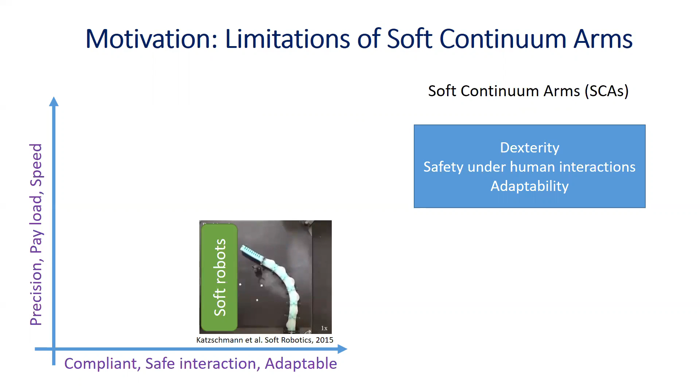While adaptable, their soft and squishy nature may not lend itself to precise operations that require transmitting large loads to the object. As shown in this figure, the capabilities of precision and speed are attributes of rigid link robots. The video shows how a soft robot is not quick enough for a simple pick and place task.

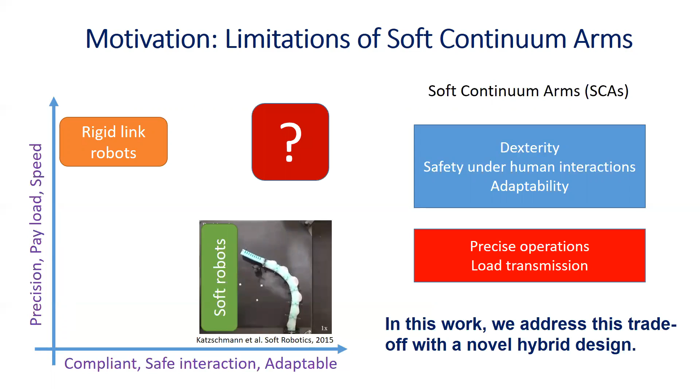So soft robots occupy the right bottom of this graph and rigid link robots occupy the top left in this graph. However, most applications require some unique facets of soft and rigid attributes that are unaddressed by either extremes in the design space. Our aim is to explore designs that are precise, quick, and also are adaptable and safe when required.

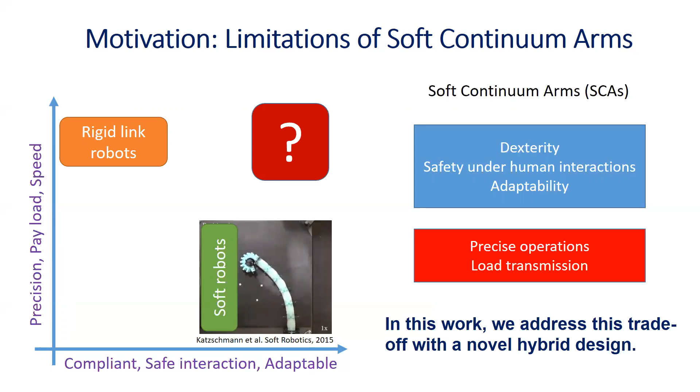In this work, we present a new design concept which is a hybrid between soft and rigid arms to overcome their respective limitations. The variable length nested soft arm or VaLeNS arm consists of a single segment soft continuum arm nested inside a concentric rigid shell. Inspired by the concentric tube continuum robots, an internal mechanism is used to extrude out or retract the soft continuum arm back into the shell.

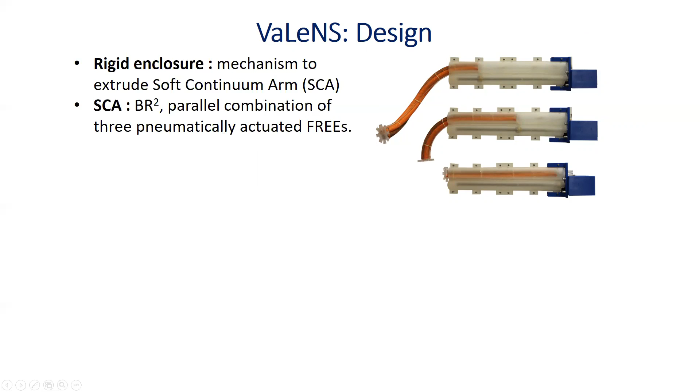When the entire arm is extended out of the shell, the robot is considered soft, while when enclosed completely within the shell, it is considered rigid. The soft continuum arm (SCA) used has a unique asymmetric architecture that can simultaneously bend and rotate in clockwise and counterclockwise directions, leading to spatial deformations as shown here. We call this manipulator BR2.

The rigid enclosure consists of a bipolar stepper motor that has an integrated threaded rod as its output shaft. This arrangement converts the motor into a linear actuator capable of precision open loop positioning. The travel nut is attached to the base of the soft continuum arm. A two-part cylindrical rigid enclosure that houses the soft continuum arm is 3D printed.

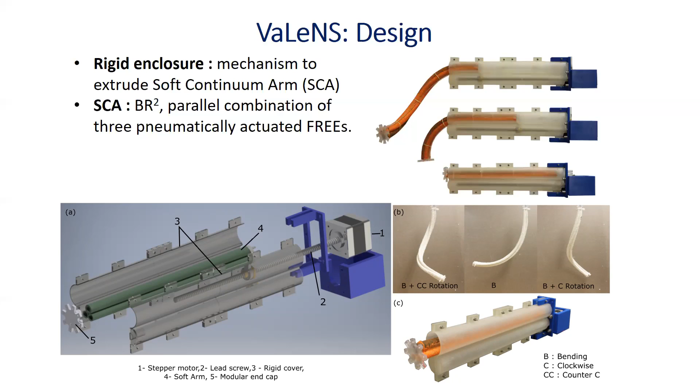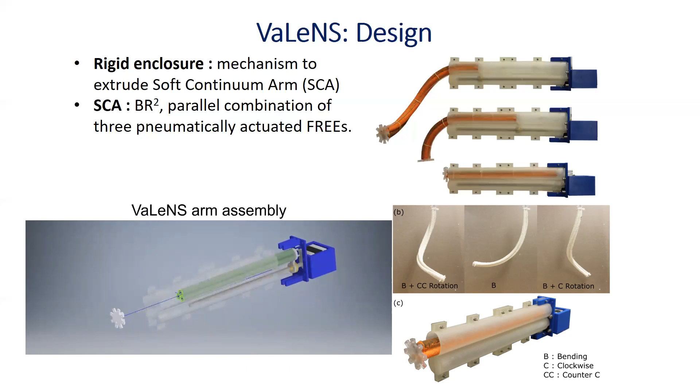The rigid enclosure restricts the rotational degree of freedom of the soft continuum arm when attached to the travel nut. In addition, the rigid enclosure also restricts the deformation of the portion of the soft continuum arm enclosed. The entire VaLeNS arm weighs 550 grams and can be retrofitted to any commercial robot platform. This video shows the assembly of the VaLeNS arm.

The VaLeNS arm with a BR2 soft continuum arm exhibits several fundamental attributes. One of them is its ability to modulate stiffness and transfer impact forces. Stiffness experiments have been conducted with the VaLeNS arm oriented upside down and applying forces at the end tip of the arm. Reaction forces by the end tip to counter the displacement are recorded using a load cell.

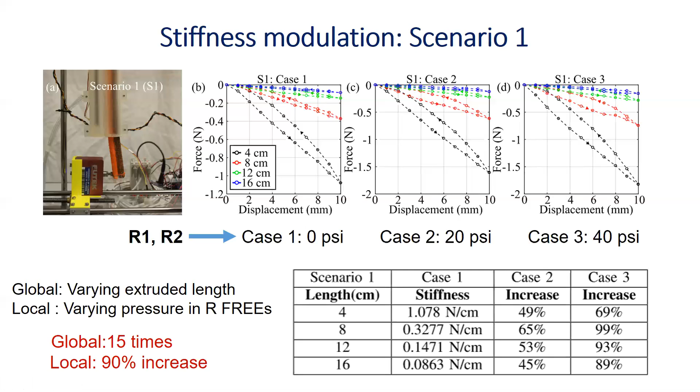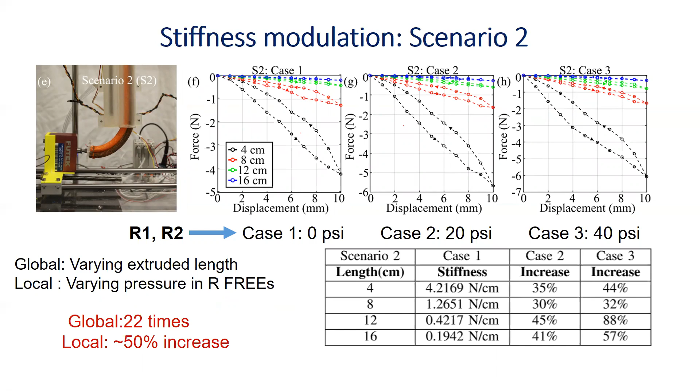For a fixed extrusion length, a stiffness change of 50% is obtained by varying the pressures in rotating actuators. To demonstrate the variable stiffness capability of the VaLeNS arm, a door opening task is performed where the door needs to be turned and pulled for the latch to completely open. In the video, it can be observed that with a 4 centimeters extruded soft continuum arm, the arm successfully transfers the force onto the door lock and is able to open it.

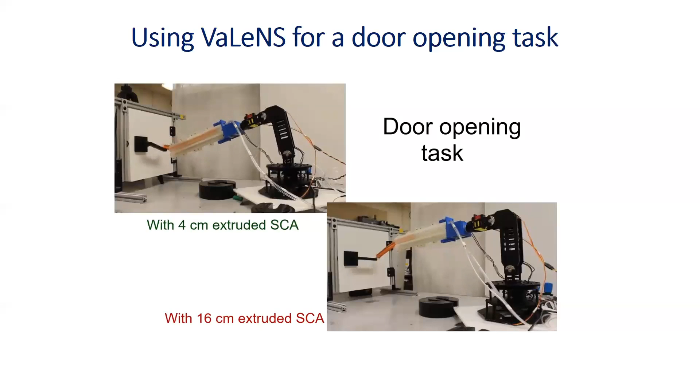The soft continuum arm is pressurized to 40 psi in both the rotating actuators in order to use its high stiffness property. Whereas the same task was unsuccessful when the soft continuum arm is extruded out by 16 centimeters.

The workspace of the VaLeNS arm can be represented as an axisymmetric surface along the YZ plane as shown here. The workspace of the variable length arm is 1200 square centimeters as shown on the left, while the BR2 workspace, when it is fully extruded to 24 centimeters length, which is its maximum extrusion, is 30% lower than the workspace of the VaLeNS arm. The dexterity of the VaLeNS arm is due to two features: inherent dexterity of the BR2 soft continuum arm and the variable length mechanism.

To understand the dexterity due to varying length, we evaluate the ability of the arm to reach a position in its workspace with more than one soft continuum arm length extruded out. The top right plot depicts the minimum soft continuum arm length that needs to be extruded to reach a point in the workspace. It is seen that the extreme periphery of the workspace, dark red regions, can be reached with the fully extruded soft continuum arm alone.

The bottom right plots the difference between the maximum and minimum extruded soft continuum arm lengths that can lead to the same end effector position. It is seen that the center area of the workspace can be approached with different extruded lengths. More than 50% of the workspace can be reached with a length difference of 1 centimeter.

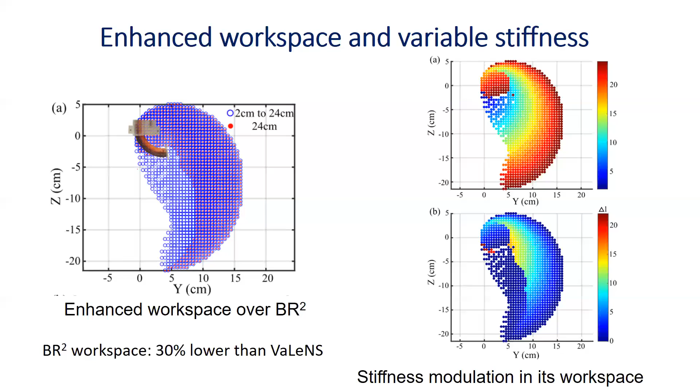When the VaLeNS arm is deployed on a conventional rigid robot, such as a 3-link rigid arm shown here, its overall workspace will be a combination of the rigid links and the soft continuum arm. The implications of the primary attributes studied can lead to classification of the overall workspace into a rigid workspace and varying levels of soft workspace depending on the extruded arm length.

The rigid workspace is generated from the end positions of the VaLeNS arm when extruded length is 0 centimeters. It is hypothesized these points can be reached in a quick, accurate, and repeatable fashion, a key characteristic of the rigid link robots. Furthermore, operating in the rigid workspace will lead to larger force transfer.

The rigid workspace is appended by a larger soft workspace as shown here, which is obtained by extruding the soft arm from 4 centimeters to 24 centimeters under the full range of operating pressures. These end positions are hypothesized to be safe as they involve the extruded soft arm and hence can be used for interacting with humans and other fragile objects.

The VaLeNS arm can be used in cobot tasks where both load-bearing ability and safety are required, albeit at different time periods. In the video, it is shown that the robot system with its soft continuum arm completely retracted is used to precisely pick up an empty plastic box. This is accomplished by fitting a suction cup at the end of the soft continuum arm.

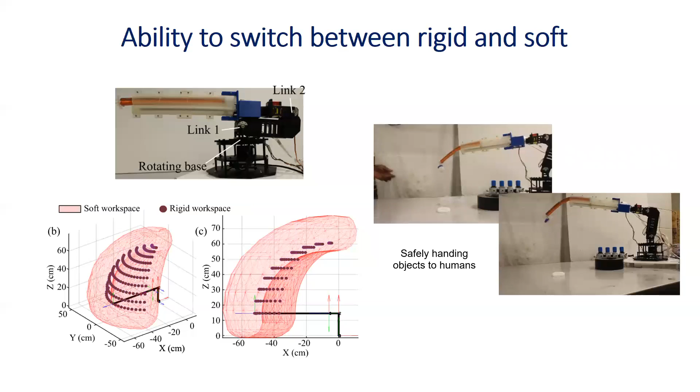These tasks are performed in the rigid workspace of the arm as sufficient forces are required to be exerted on the objects. The objects are then dropped or handed over to the human safely in the soft workspace, where the soft continuum arm is sufficiently extruded.

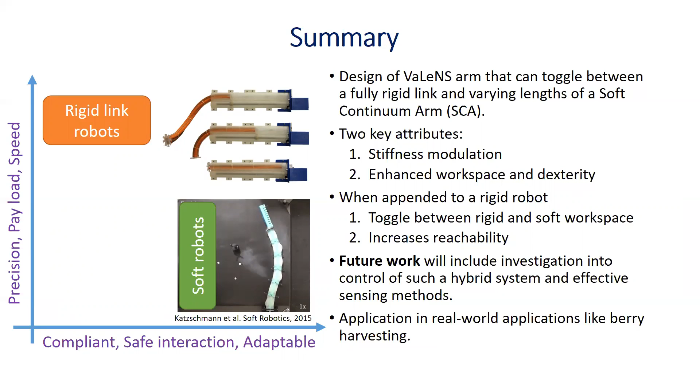To summarize, we have presented a design which fits in the unexplored regions of this graph that can toggle between fully rigid link and varying lengths of a soft continuum arm. Two key attributes of this design are stiffness modulation and enhanced workspace and dexterity. Future work will include investigation into control of such a hybrid system and effective sensing methods.